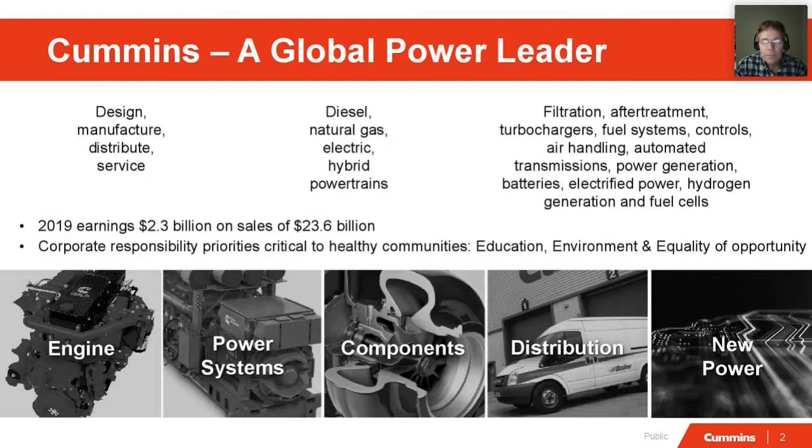Let's put some numbers to that now. We're in about 190 countries, 60,000 employees. Last year, we built over 1.4 million engines. We largely own our distribution. We spent about $1 billion last year. We started in diesel in 1919 and remain headquartered in Columbus, Indiana.

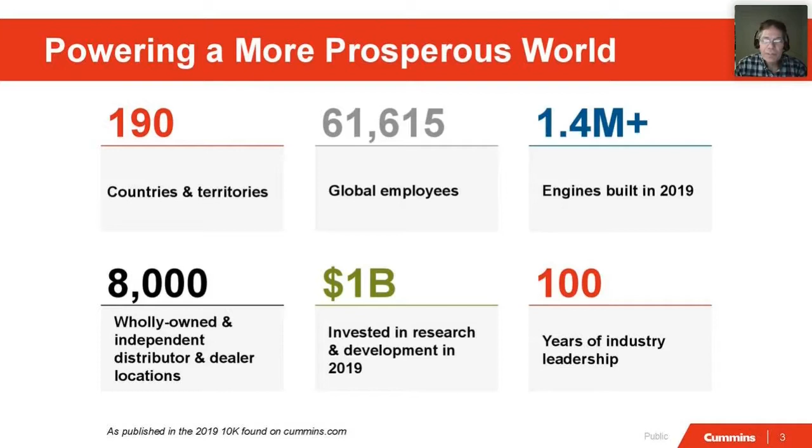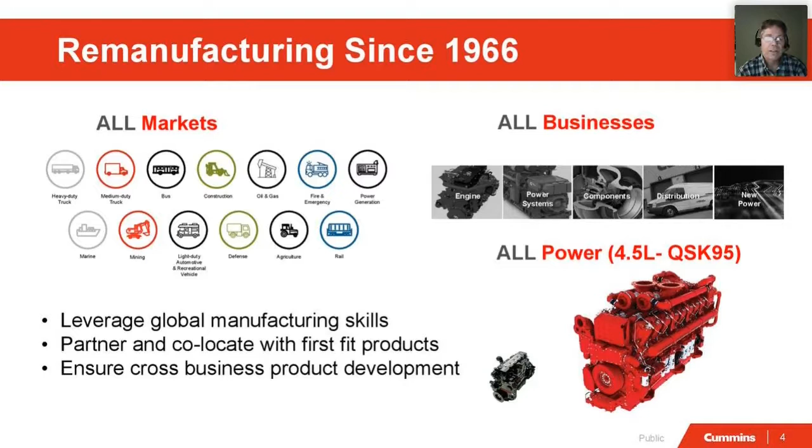We've also been remanufacturing for a long time, over 50 years, and we support all those same markets where Cummins supplies new products. Let's take a look at the products. There's a whole list here, but let's look at those a little bit more. So engines. We remanufacture engines. What's the context there? A couple.

One, there could be a catastrophic failure, where it makes economic sense to swap the whole engine instead of repairing it. Or there are other applications like a mining truck that will easily consume 4 engines over its lifetime. And so now we're not just talking about remanufacturing as an option that a customer might consider at some point. For some applications, it's absolutely expected to support that high value asset over its life cycle.

The other kind of things you'll see, cylinder heads and turbochargers, connecting rods, those will be parts typically used for an overhaul. Let's say the truck is at midlife, the engine needs to be refreshed, and so this will be an overhaul event, and those components then would be replaced. There are others in here, like a fuel system, a fuel injector in the lower left. Those are small, but they're high value, high precision, tolerances on the order of microns.

They tend to have significant surface engineering, specialized coatings. And these things have a tough life. They're operating at 17 hertz, operating well above 2,000 bar pressure, and they might need to be refreshed at some point during the life of an engine. And so those make a very good remanufacturing candidate.

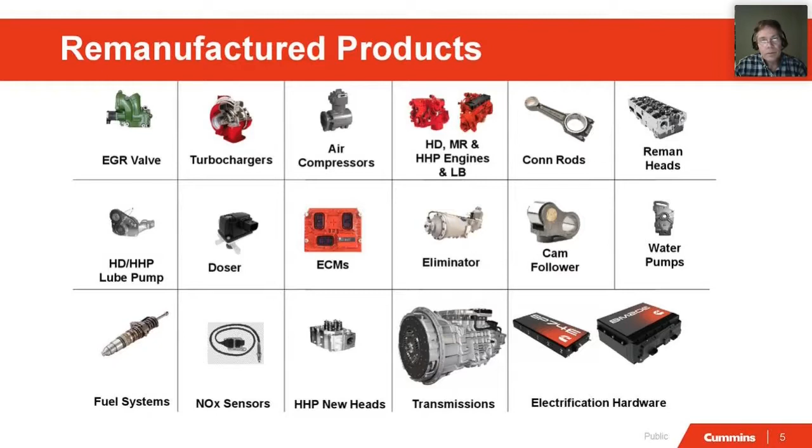And then in the lower right, you're starting to see some newer products, transmissions, automated manual transmissions, as well as electrification hardware. Those images are for very large batteries, but there'll be other components as well, traction motors, power electronics, that will be remanufactured as well. We do this around the world.

The red circles represent our remanufacturing plants for our smaller products. The core is returned, we call that reverse logistics, right? Where that core, the used old product, has to come back. We've got reverse logistics core centers around the world represented by the black circles. That's sort of the collection points then for the core that is then shipped back to the remanufacturing plants.

The larger engines, of course, are heavy, and the transportation is expensive. And so we tend to handle that more on a regional basis near large populations of engines, and those are represented by the blue circles.

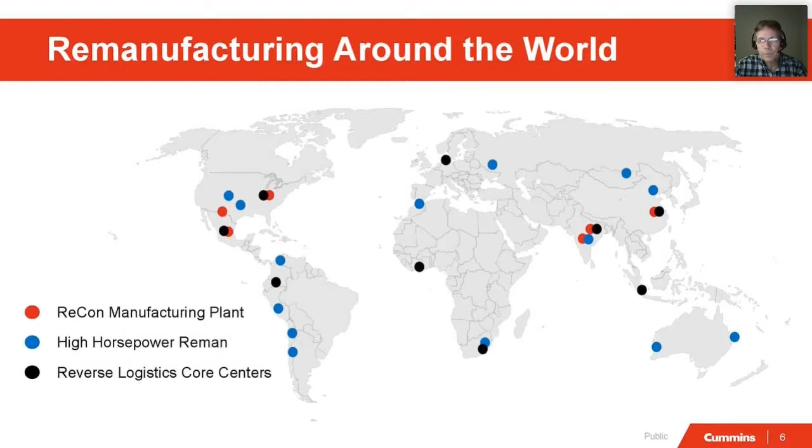We've been remanufacturing in India now for about 10 years. We've got an export plant in Pithampur, where we produce both heavy duty and high horsepower components listed there. We also have a domestic plant on the Cummins mega site in Phaltan, a couple hours away from Pune. And there again, we're focusing on the heavy duty and high horsepower components.

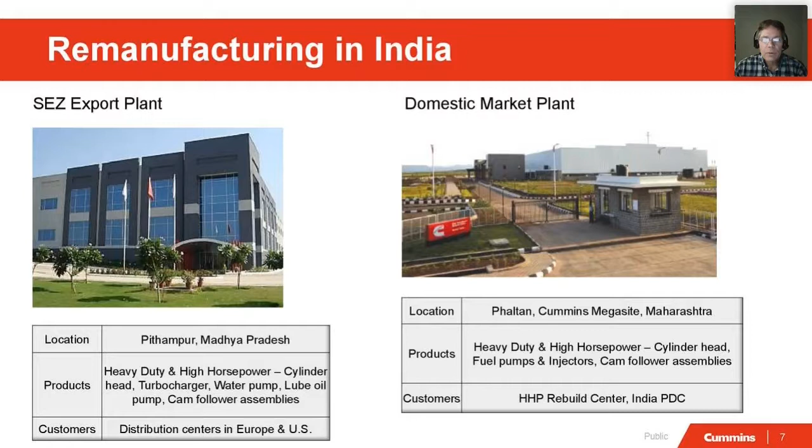Those are supporting both the India Parts Distribution Center as well as the high horsepower engine remanufacturing center. Rajiv provided a nice overview of the process steps. I'll go through those real quick again, but highlight a few of the technologies that we've developed along the way to facilitate that. The first point I'll make is, again, this is a factory-based process. These steps are typically occurring on a small line as opposed to some benchtop process.

But it begins with disassembly. And you can appreciate that these products are operating for a number of years in environments where they may be exposed to road grime or other sort of dirt, and there can be some external corrosion. And so simply taking them apart can be difficult. And so we've automated and applied some technologies to facilitate that.

Next is cleaning. The same challenges are part of cleaning as well. We've got aqueous methods, thermal methods, even molten salt methods to reduce the corrosion, the residual oils and greases, the dirt. And the technique that you're seeing down below there is laser cleaning, a wonderful process. The laser ablates whatever the debris is, and because the clean metal underneath has higher reflectivity, the laser doesn't keep going, but stops once it's removed the debris from the surface.

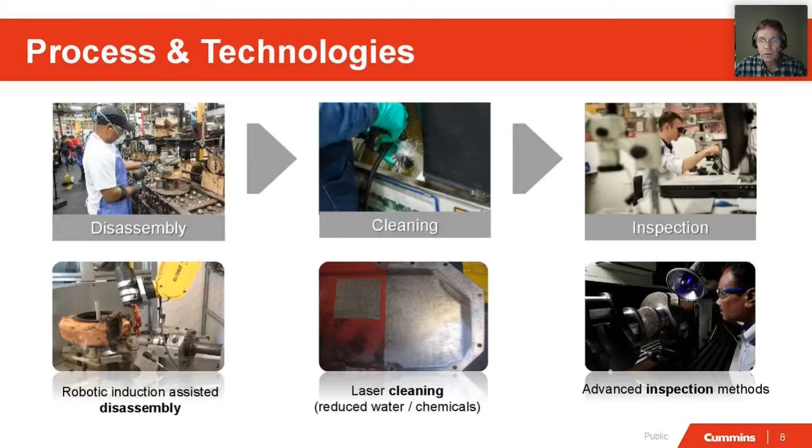Next comes restoration or salvage, and there's a variety of things that we do there. There could be mechanical means for inserts, sleeves, bushings. Then we've got material addition technologies, thermal spray to build up worn surfaces, or more structural methods, traditional welding, or more advanced welding, like laser deposition, where again we can build up that worn surface, and because we can choose the material often, the resulting surface actually can be better than the original.

If a cast iron component was the original part, then that wear surface is cast iron typically. Well, here we can choose something that's even more wear resistant, and so arguably the remanufactured product is even better than new. And then finally, we've got the assembly and testing step, where we will typically use a version of the original process. We certainly have and apply the original specification, and then we can apply the same or similar test method as well.

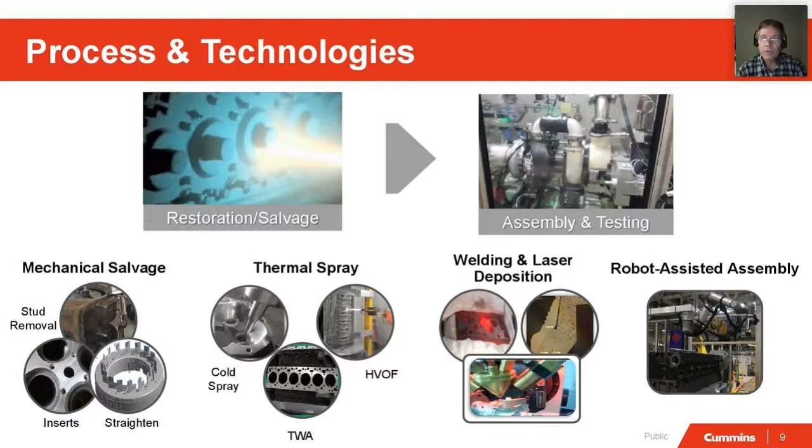From a Cummins perspective, it helps us manage and support the customer over the life cycle. Early in life, remanufactured products may be used to service warranty. In the middle of the life cycle, we may have the competition coming on the scene, what we call will-fits, at a value price; then remanufactured products can help meet that need. It's same as new warranty, same as new performance, same as new global sales and service support, but at a value price. And so that gives those customers exactly what they're looking for.

Then late in life, it also helps us support our customers once the original suppliers, due to the loss of volume for that particular part number, may become expensive or may not be so interested in continuing that supply. So remanufacturing can help us support the tails of the life cycle. And we'll support our products for literally decades. We would still remanufacture various components for 40-year-old engines.

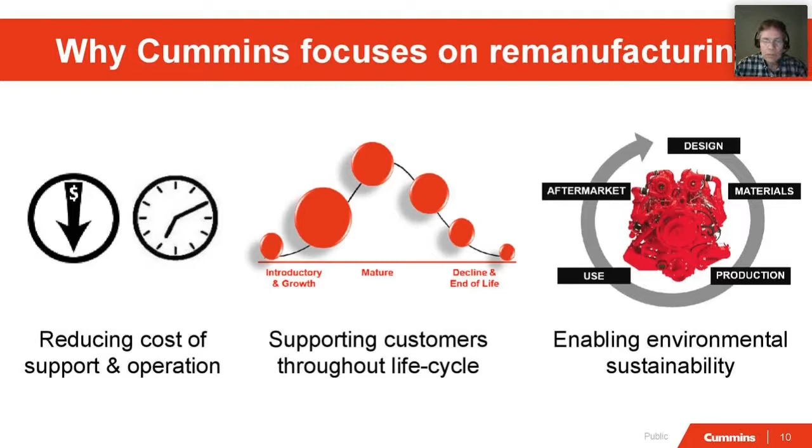Increasingly on the right also is the connection of remanufacturing to environmental sustainability, and we'll talk more about that in a second. So first, from a customer perspective, what's the value proposition for remanufacturing for fleets and others that are very sensitive to uptime? After all, this asset is used to earn a living. And if it's down being repaired, then it's not making money for the customer. And so swapping an engine or that major component with a remanufactured one is just faster, and it's a way to get that asset back to work.

Because it's a factory process to the original specifications in our case, the customer is also confident in the quality. So this is a factory process, and the core terms vary a little bit around the world. Maybe we'll get to that a little bit in the Q&A, but the idea is we make it simple.

Purchase the product and return the core. So at the bottom line, the graphics at the bottom help illustrate the process. That core is returned. We're able to apply original factory methods. We've got the original factory specifications. We apply advanced technology, supplement with genuine parts, and produce that very high quality product.

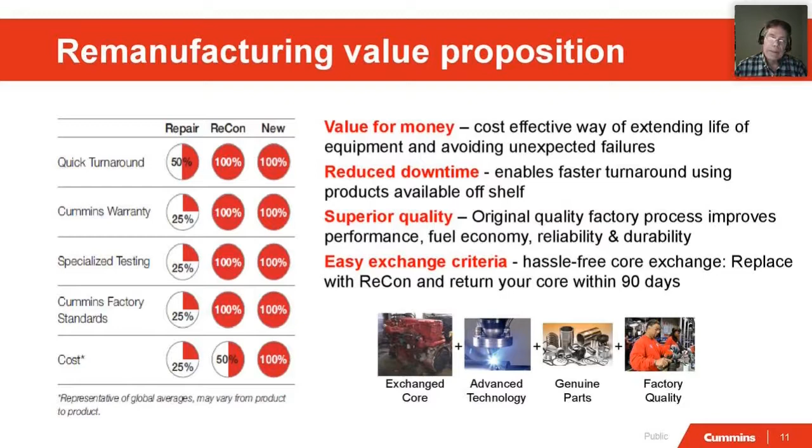Okay, let's start to pivot a little bit toward the sustainability and environmental perspective using some numbers from India. First, in the upper left, easily 75% of an engine can be remanufactured. We've got lots of high value iron and steel castings and forgings that are good candidates for remanufacturing. Going all the way to the lower right, over the last years in India, we've recovered over 10,000 tons of core, producing over 500,000 different units shown there in the lower left.

Okay, so what difference does this make? Well, first of all, bottom center, this takes a lot less water compared to the extraction and processing of ore and making new castings and forgings. So we think we save 150,000 kiloliters of water every year. And water matters to us. We operate in water challenged areas, and we know as we think about the future that water will become increasingly one of those constrained resources.

The other thing is that not having to recover that ore and reprocess castings and forgings saves a lot of energy, with the result that there's less greenhouse gas emitted. There are a variety of studies, by the way, with varying degrees of material reuse that help validate some of the numbers that you've been seeing. I think Rajiv mentioned a 50% sort of energy savings in the one case, and there are other analyses that show that number is even higher.

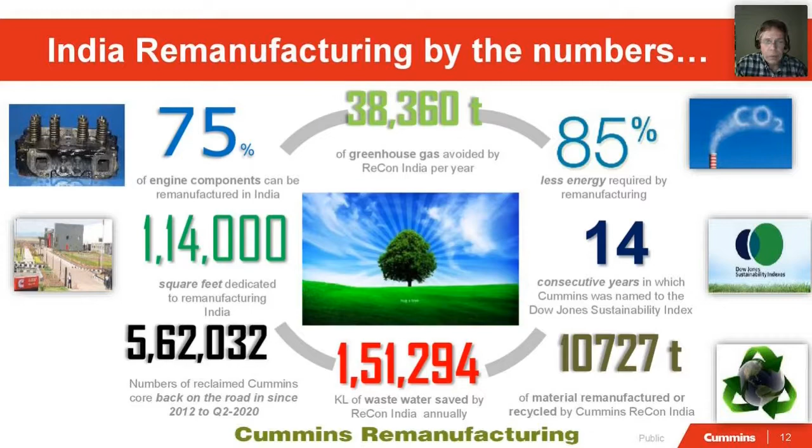Okay, continuing our pivot towards sustainability. Cummins is just finishing up a decade of largely meeting or exceeding sustainability goals relative to our own operational footprint. By that I mean the waste that we produce in our facilities, or the emissions from those facilities, or the energy consumed by those facilities. But as we look to the future, we recognize that, okay, we have to continue to do a good job there, but even more.

And so here we've got inputs to the planning that was done recently for the updating of our sustainability plans, and you can see them there, right? And some of them you can appreciate maybe firsthand. So pollution is a growing concern. Climate change is real and it's happening. We get extremes of weather, flooding in one case and drought in another. And population is growing, and along with that growth comes increasing waste, and then also just in general resource consumption.

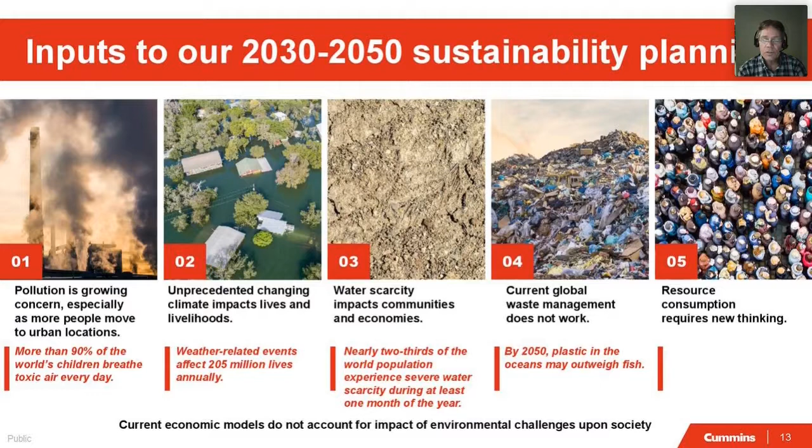And we anticipate that we have to decouple, or society needs us to decouple population growth from resource consumption. We just can't consume at the same rate that has been done historically. So what did we do with this? First, let's talk about our 2050 aspirational targets. They're really in three groups.

At the left, we've got the goal of communities being better because we are there. That's a significant statement. Sure, we enable employment, but there's also impact in the community or in the environment locally, and so our goal is for the net effect of our presence to be positive wherever we're operating.

And in the middle, we've got to do our part to address temperature rise to, say, 1.5 degrees Celsius. Then what we have to do is back calculate what the transportation contribution to that is, and therefore what reductions we have to make in our product portfolio to support limiting that temperature rise to, again, whatever the scientific consensus is. And that's what we mean by science-based goals in a more absolute sense.

But what I'll talk most about will be the third category there, resource stewardship, using materials in the most sustainable way. And so by 2050, we want to say, look, nothing's wasted. We design it out in the first place from products and processes, or we use it again. And again, we see water, the idea of using what we need, but returning it clean.

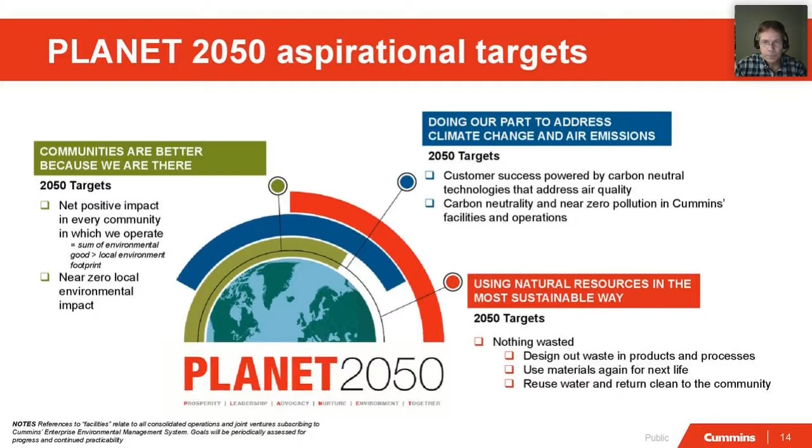Talking about 2050 is fun. Some of us won't be here, or at least not working on it.

But closer to home, we've got some 2030 goals. Again, in sort of the three groups. At the top, we've got those climate-related goals that I talked about. At the bottom, we've got some of those waste-related goals. But in the middle is the idea I want to talk about, and that is creating a circular life cycle plan for every part, to use less, use better, use again. I was the advocate for this concept of the life cycle plan for every part.

It can be difficult to convince a designer to prepare for remanufacturing. They may ask, well, how do you know you're going to reman that? Or what will the volume be? And those are reasonable questions.

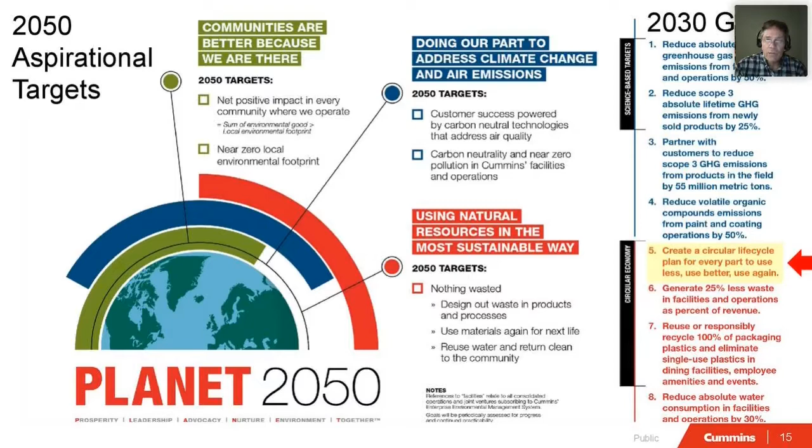But on the other hand, we have to be more thoughtful if we're serious about these kind of goals at the front end of the product design, and say, hey, what's the plan for this product? So it seems to me that that's a reasonable starting point. And then oftentimes, remanufacturing will be part of that plan and answer.

So what does this really look like if we talk about a life cycle plan for every part? I appreciate already the discussion of the various R's, but I'll talk about them a little bit again. If we're talking about reducing, then obviously we can use optimization tools to only put material where it's needed. And modern computer tools enable us to do this quite effectively. And we can choose material and processes wisely based on the planned usage cycle.

If, let's say, there's a gasket that's really going to be replaced at the time of service, well, then that doesn't have to be designed for 1,000,000 miles, right? On the other hand, that major casting or forging does. We can also produce less manufacturing waste in the beginning using additive manufacturing. In fact, we're doing that now already. So that is 3D metal printing to support legacy parts when perhaps, as I mentioned, the original supplier is no longer available.

Okay, well, when the customer is first using the product, we're in the reuse and repair sort of mode, and so for that case, we want to make sure those wear points are durable or readily replaceable. Sometimes an insert or a bushing is all you really need to protect that more expensive casting or forging.

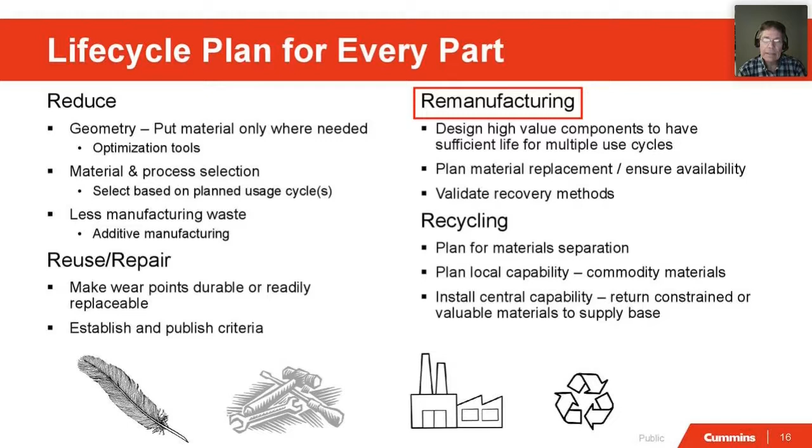So we are restoring the expectation of a full second service life. Could be second or third, fourth. It's not a limited scope repair. It returns a saleable product to commerce, typically sold to a different customer. It's a product, not a service. And then importantly, it retains the embodied energy. We're not reducing the material to the sort of raw level.

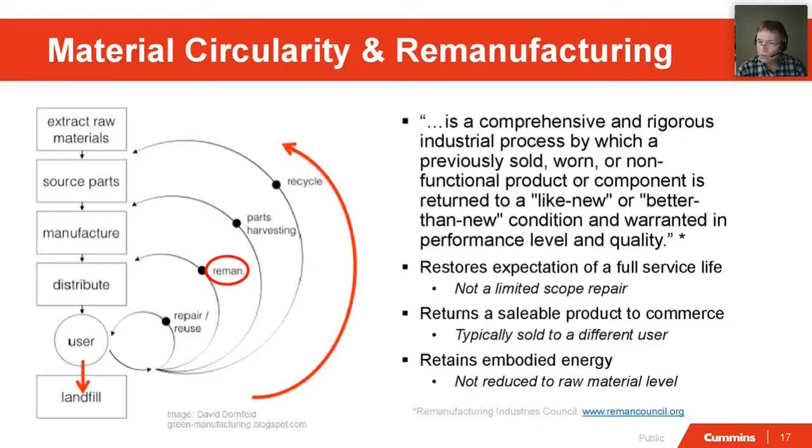But in summary then, remanufacturing is good for the customer. Same as new performance and superior value. It's good for business. It helps us support our customers over the life cycle. And increasingly, it's good for the environment and part of our strategy for good stewardship.